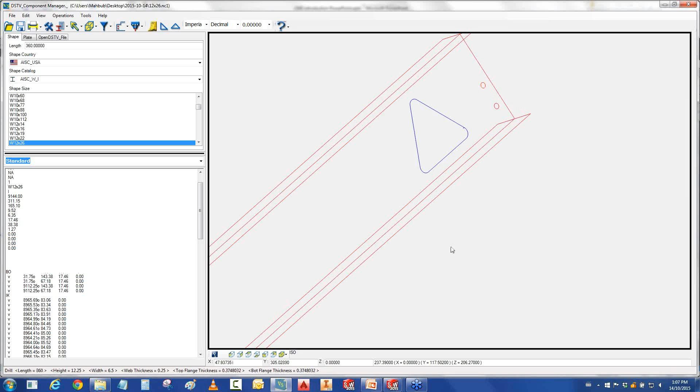So if I just select the first line and zoom out, and select the first line again, it selected the corresponding operation over here. So they're connected in real time - anything you do in your graphical console is going to impact directly your DSTV console.

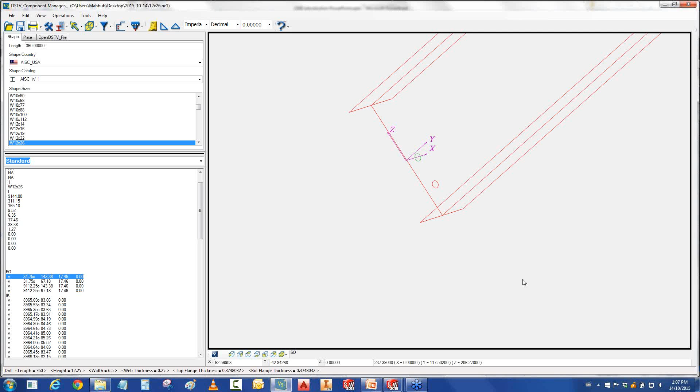So now I'm going to go to the SolidWorks platform. I have a sample I-beam open here. As I see, we got a couple of drill operations in the web and also in the bottom flange, and at the same time I got some cuts on that side as well.

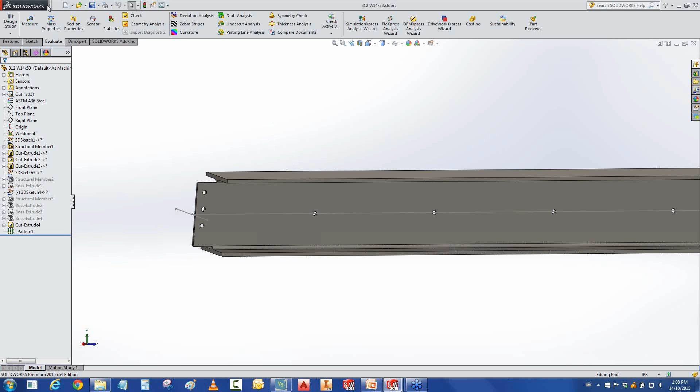So I'm going to show you the process involved in producing NC1 from a given SolidWorks file. What do you do? You open your SolidWorks file that you want to convert to NC1, and then you go to tools, where we have the plugin installed. You get 2 options, one for plate, one for the shape.

We support both plate and shape. What kind of shape do we support? We support all kinds of I-beams, channel, and angle. Unfortunately we do not support round profiles in SolidWorks, and also we do not support the T profiles at this point. So as long as you have the I profile, channel, and angles, and at the same time all the plates - it could be a round plate or any kind of regular plate - we support here.

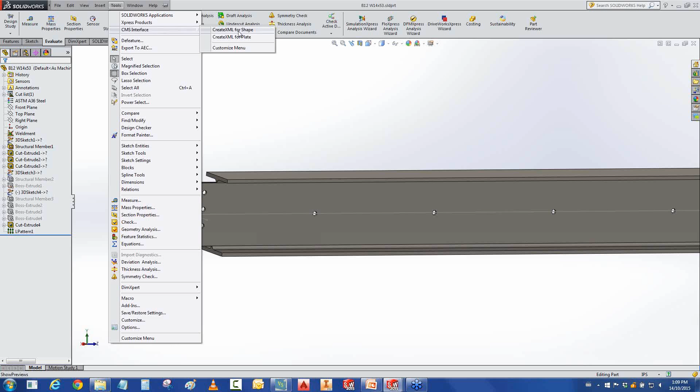So what do you do? You just come to these options and select the right tool you're looking for. I'm going to select the Create XML for shape. Why Create XML? What this plugin does is actually create an XML file from the SolidWorks file. The plugin produces an XML file, and the XML is sent to the CMS.

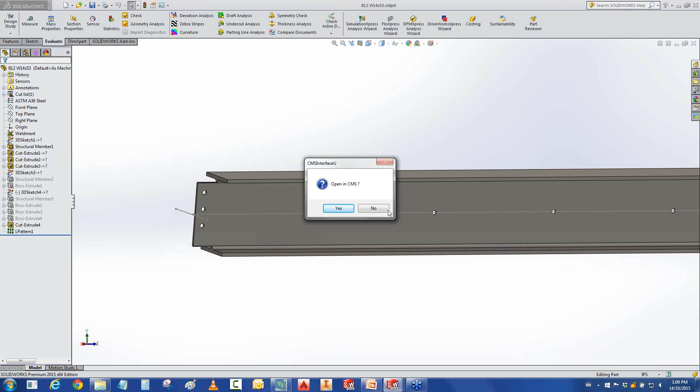Then the main CMS platform picks that XML and produces the NC1 file. Now it's asking for permission to open it in CMS, so I'm going to open it in CMS. So what's happened in the background - the XML has been produced, and then it's looking for the correct size. So I know what's the correct size, I'm going to go and find that correct size.

This automation has not been done yet, so we are still working on that. But at this point, you just have to choose the correct profile that you are looking for. Once you know what's the correct profile, you select this one and say yes.

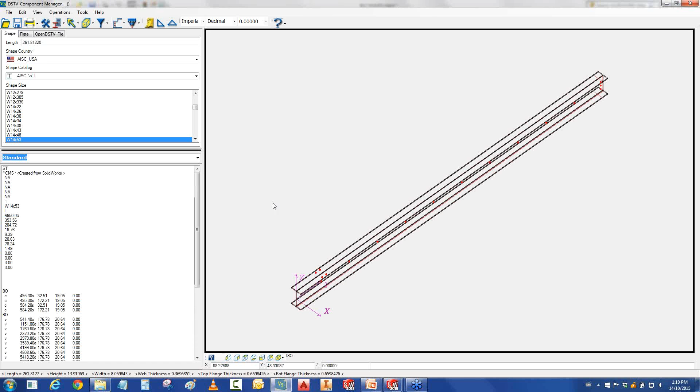So here you go - you got your DSTV produced in real time. The DSTV is produced. If I just remove the shape lines, I can see the part produced here. So this is the process involved in producing NC1.

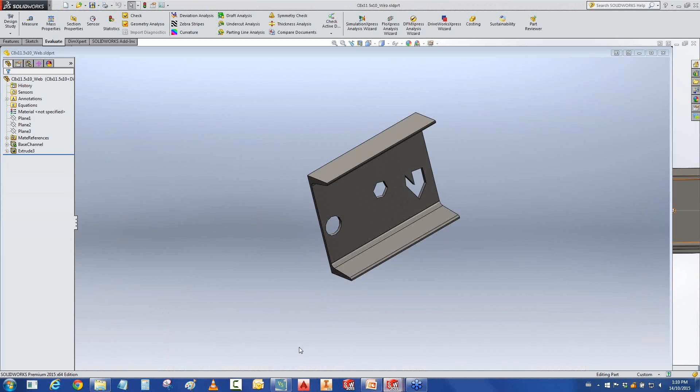So I just want to repeat that process with another example. Okay, so I have a channel here, with just a funny cut on that, but I just want to show the process involved here. Again, what do you do? You just go to tools, select the right plugin, and then it asks for the permission to open it in CMS.

You say yes, and then the XML has been produced. You just go and look for the correct size in CMS - at this time it's a channel. So I'm going to select the correct size for my channel. I select yes, and the DSTV has been produced here.

So I just chose that part on purpose. As you can see, this drill is on the left hand side corner. But if I just look at the DSTV over here, I can see the drilling on the other side of the part. So I selected this one on purpose.

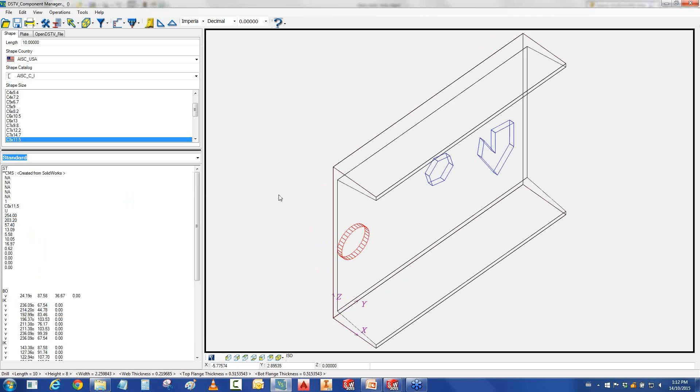This is the same part - it doesn't matter how you see it in CMS, but if you still want to see it exactly as your part, you can do that quickly in CMS. So what happened is the part was mirrored. So what I do is go and mirror that part to produce the NC1 file that corresponds directly to my part file.

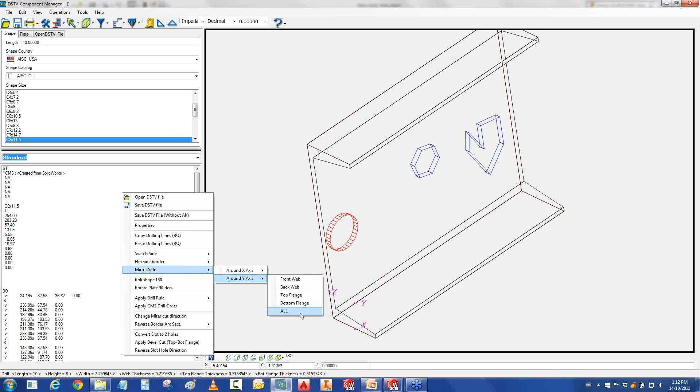So the purpose of showing that is, let's say you have a left hand side and right hand side part, and you just don't have to draw both sides in SolidWorks. So you can actually save your time in terms of your modeling purposes. You can just produce your left hand side and come to produce your NC1 for the left hand side, and then go and use that mirror operation and produce your right hand side part. So that kind of automation.

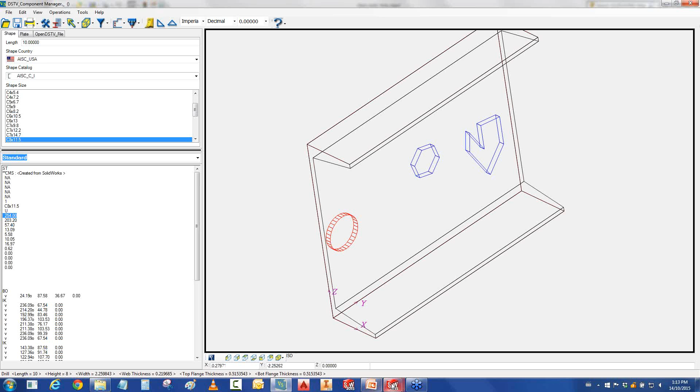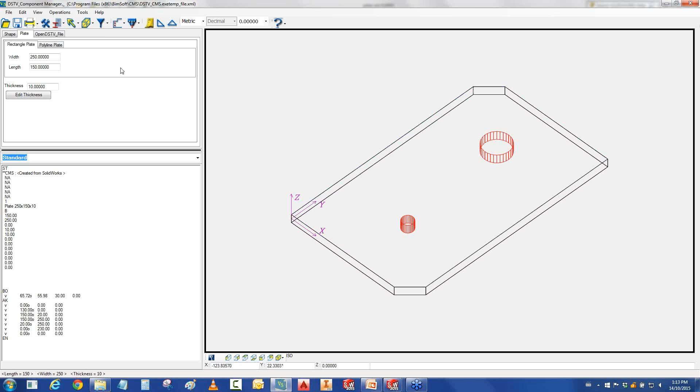This is just a quick example of how you can produce both left hand and right hand side part from NC1 from SolidWorks. Now I want to show you the process involved in producing NC1 from a given plate. So I have a simple plate. You just do the same thing: select create XML for plate, then send it to CMS. Plate is pretty straightforward because you don't have to select the size, because CMS has the internal capacity to understand the diameter or parameter of the plate, so it brings this by itself. Then you just save your file. That's the process involved in producing NC1 from a given SolidWorks file.

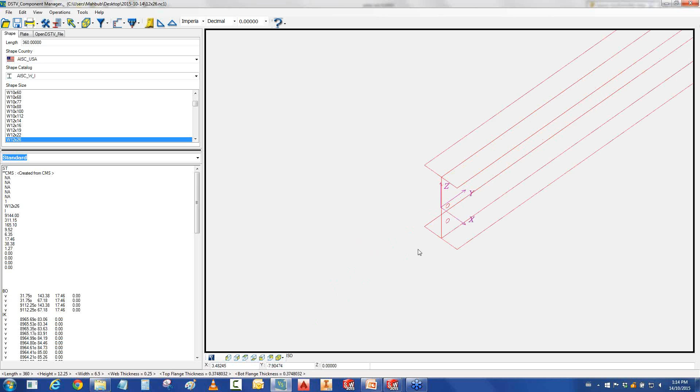I'm going to show you an example of different manipulations you can do in CMS. I'll open a sample NC1 file. You can even open a third-party NC1 file and start manipulating that part here. So I'm going to show you an example of those. This is an I-beam, and I'm going to zoom in here and select this one. Let's say for some reason I just want to change the position of that one.

So let's say I have the XY position over here, and at the same time the diameter here. I'm going to change this diameter and the position parameter here. I'm going to put it more inside the part, and also at the same time change the diameter as well, just to show you how we can do it quickly in CMS.

At the same time, you can change your slot, change your drill to slot operations as well. So I'm going to give it a distance of 4, and at the same time, just for fun, give an angle of 45 degrees. You can actually change your operation in CMS in real time and see all those changes in the DSTV file. As you see, all those parameters have been updated here - both angle and distances and diameter have been changed.

Sometimes I have clients whose machine cannot support slot operations. So what they look for is two drill operations, at the start point and at the end point, and they manually join these two drill operations. We actually have a quick tool in CMS that you can use for that instead of finding those two drills manually, which would cost a lot of your time.

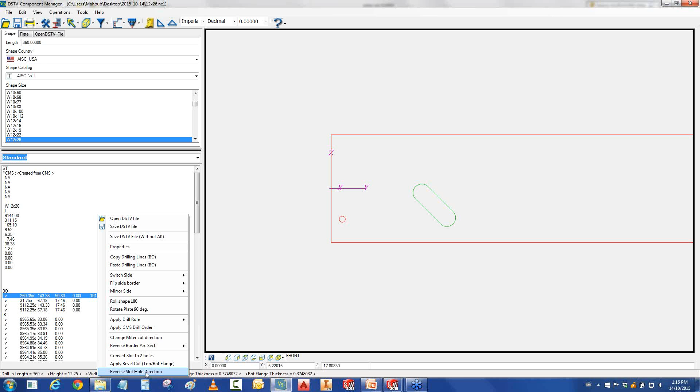So you just select this one, and we have a tool over here called convert slot to two holes. Once you apply that, if you zoom in here, you see this slot hole has been converted to two holes. You can actually see these two additional holes in the DSTV as well - here are the two additional drills. So you can just convert any slot to two drills.

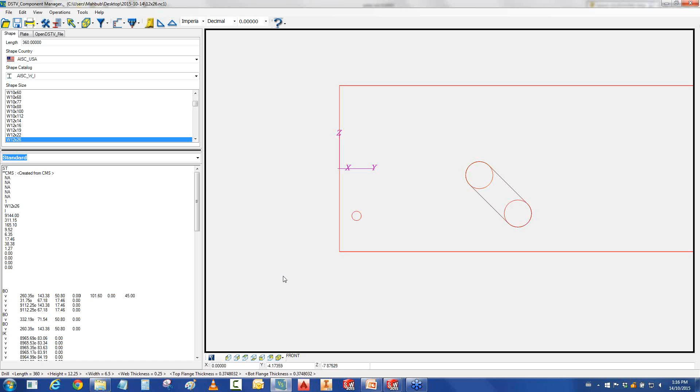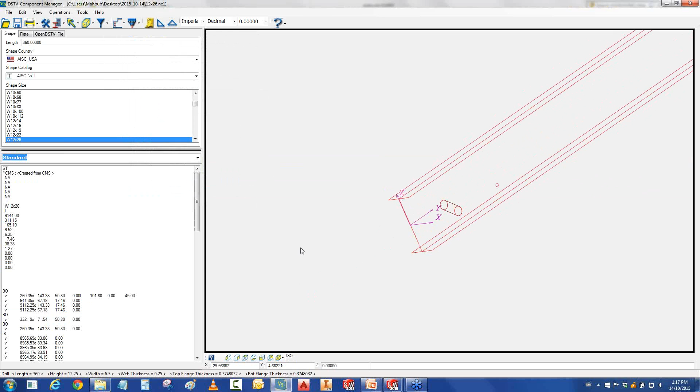At the same time, I'm just going to change that position quickly. I want to do some other operations as well, so I'll do it pretty quickly - change the position of this one and put it back. If I go to the ISO view again, this is my part right now. Some of our clients use a couple of our quick tools here, which are pretty handy to use - one of them is Cope Chamfer.

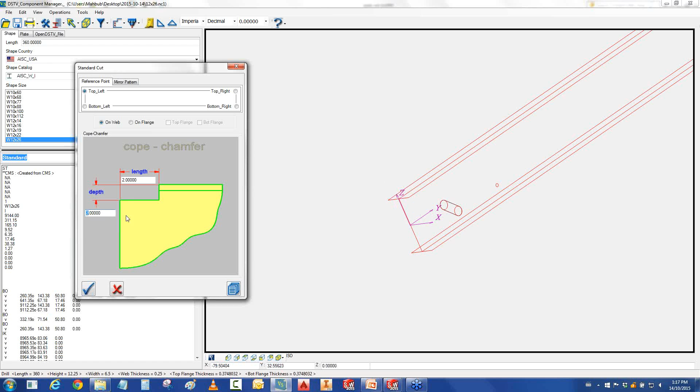So I'm going to use that one on one of those. You just have to select where you want to apply it - I'm going to apply it in the web, and then in the top left corner over here. You just give it the parameters - I'm going to apply 4, 4, and 4 or 2 at this point, and say apply. Once you apply this, you see your graphical window and the DSTV has been updated correspondingly. So it's pretty quick.

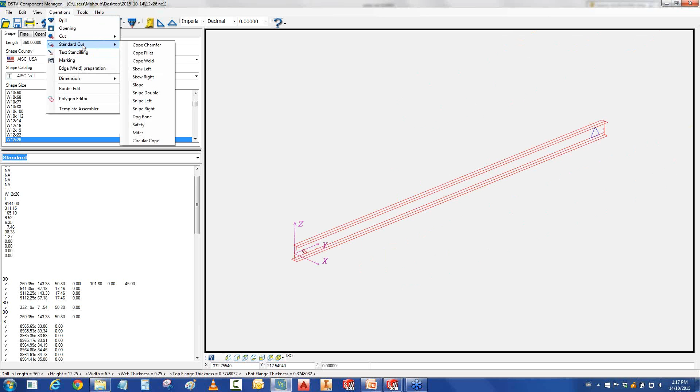At the same time, if you just want to apply other operations, one of the popular ones is miter cut. I'm just going to apply it on my flange, on the top right corner. You can give it an angle or a length, whatever you want. Let's say you want to apply a 15-degree miter cut on the right hand side, and the length gets calculated in real time.

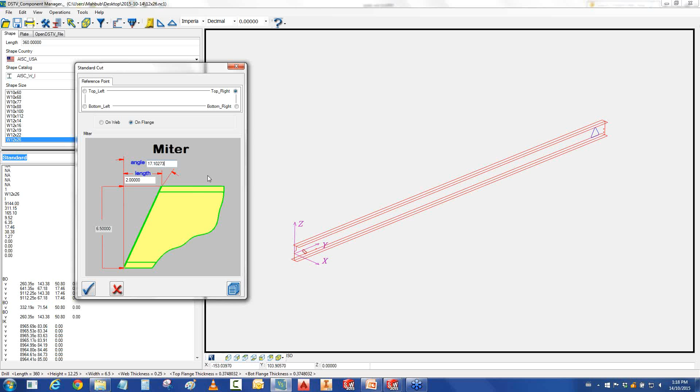Or you can do it the other way, giving it a length for how much you want to cut on that side. Let's say I put 2. So the angle gets calculated in real time, and then you can apply it here. As you see, this cut has been updated and applied - this bevel, this miter cut - and at the same time on my DSTV, the miter cut has been updated.

One more thing I want to emphasize: these 5 info lines are not necessarily important for the CNC machine to do operations like drilling, internal cut, or slot operations. These are actually for our own users' purposes, so the NC1 handler knows what part he's handling, who's the client, what's the job number, that kind of stuff.

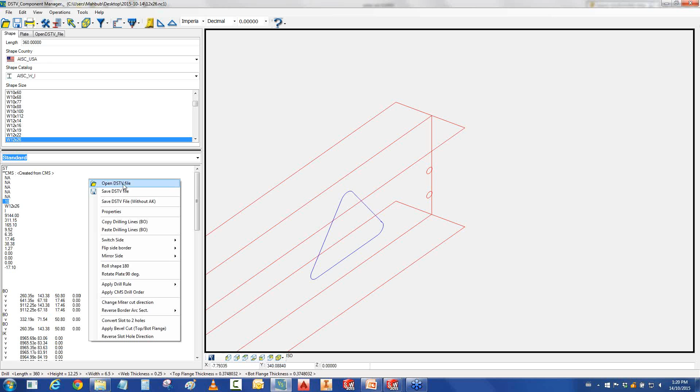At the same time, if you have multiple parts with the same operations, you can change the quantity in real time. So you can use that same NC1 file for your 10 parts which are exactly identical. You don't have to feed your machine every time with those NC1 files - you just feed it once, and if you have 10 identical parts, your CNC machine will take care of that. I want to show you how clients actually take care of those lines sometimes, so I have a sample here.

See, they put the part number, what kind of client it was, and what's the purpose that you're dealing with in that NC1. So that kind of stuff you can actually do in CMS.

I also wanted to show you a couple of other examples you can do quickly in our CMS platform. One of those is text stenciling and marking. Let me show you a quick example of applying text stenciling. Let's say I want to do some text stenciling on my front web. I come to the correct view - I'm in the front web. I select my text stenciling tool, then give it a position, where you want to apply this text stenciling. I'm currently in imperial mode, so I'm going to adjust the x and y offsets.

I'm going to put something in the middle. Since my part is 360 inches, I'll say something near 150 inches, and my part is 12.25 inches in height, so I'll put it at 6 inches. At the same time, I can give it an angle, but I'm not going to apply this at this point, so I'll say yes. If I zoom in, I can see the text stenciling has been applied. At the same time, if I look into my DSTV window, the DSTV SI, which is for text stenciling, has been applied in V, which is front web - all these parameters have been updated in real time.

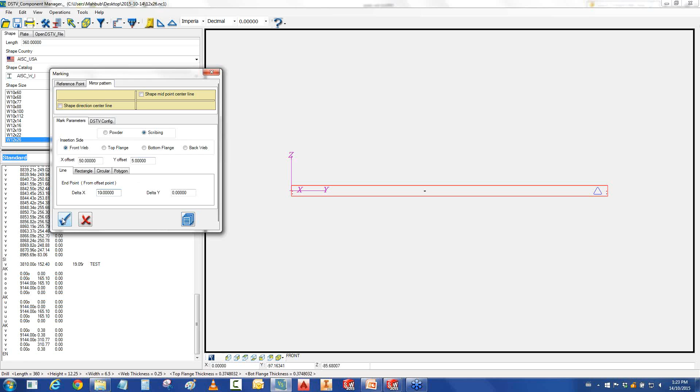Again, you give it the reference point, where you want to apply it. I'm going to say 50 inches in the X direction and 5 inches in the Y direction, and I'm going to apply a line at this point. You can apply a line, a rectangle, or do circular marking as well. I'm going to go for just line marking, so you give it a del X and del Y. I'm going to keep it a straight line, so my del Y will be 0, and I'll give it a 10-inch length. I'll say apply - here you go, you can see this line applied in real time.

At the same time, if you just select this operation, you can see this marking tool has been applied in NC1 as well. So these are the quick tools that you can apply in our CMS.

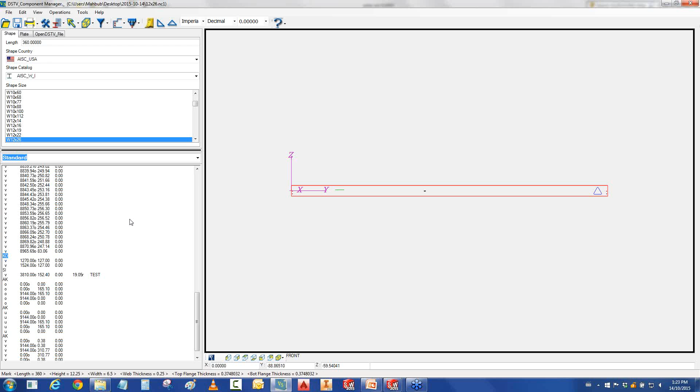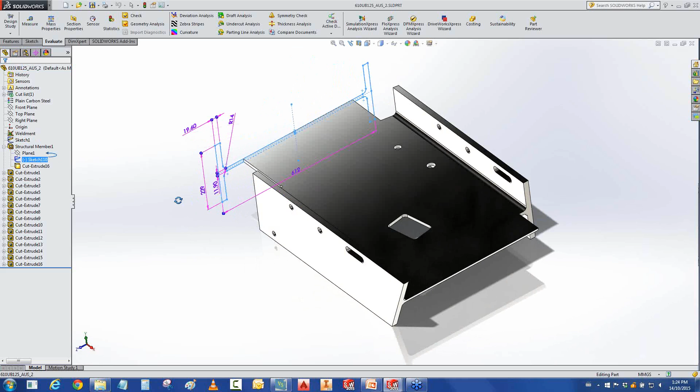I want to show you one more example. I have two test files here to show you the compatibility of the SolidWorks file. As you can see, my main profile is presented here, which is really important and crucial for the CMS plugin, because the plugin has to read that profile. At the same time, all those features have been used, like extrude, and all the sketches are present here. These are the ideal files that are pretty easy for CMS to pick up and produce the NC1 file correctly and seamlessly.

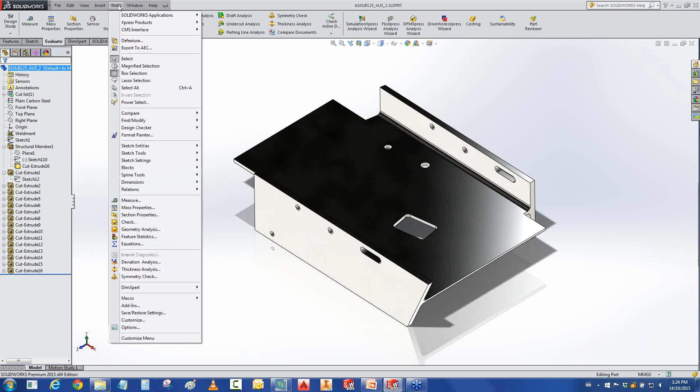Shouldn't have any issue at all. So what you do is just send it to the correct plugin, and then you select the correct size. I'm going to select the Australian profile, so I'll select the correct size, and say yes. So here you go — you get all those operations coming in no time.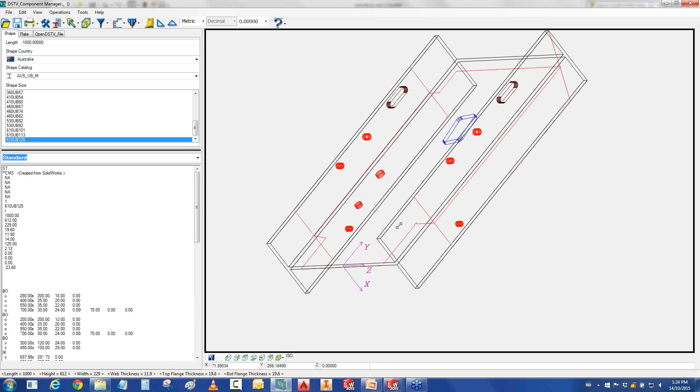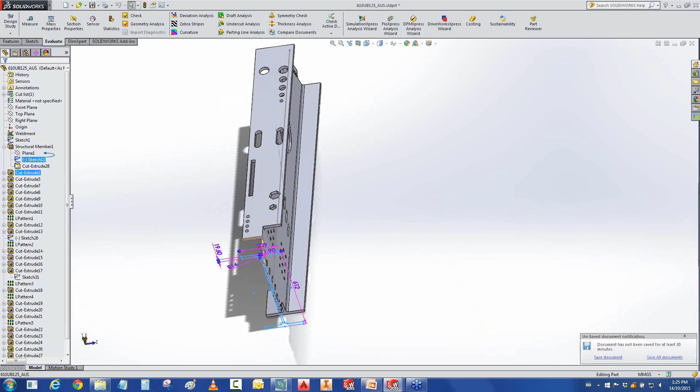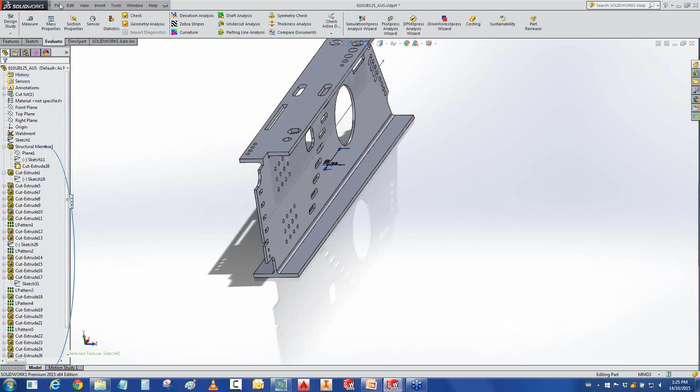It's pretty straightforward, so I'm going to show you one more example. Again, this is a fancy I-beam, so you get tons of operations here. As you can see, the main profile is sketched here, and at the same time all kinds of features have been used — cut, extrude, linear pattern — and all those features used are actually present in this part file. That's what we look for in CMS in a given SolidWorks file. As long as you have all that data, CMS will have no issue at all and will produce the NC1 file in no time. So I'm going to send it to CMS again.

I'm going to say yes. So it reads the XML file from SolidWorks, and it's producing an XML file. What you do is just go and select the proper size. The proper size has been selected, and say yes. And here you go — you get your NC1 file ready in seconds. So what you do is save your file. These are the things I wanted to show you so far.

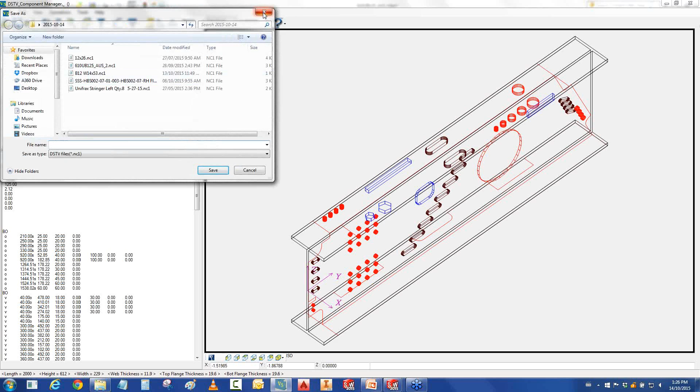Just one last thing, it's pretty interesting. I'm going to open one of the files here to show you some of the powerful built-in operations within CMS. Let's say I have a channel here. To comply with this cut on my web, I need a web edge preparation, or bevel operation on that. So what do you do? You can do that manually in CMS.

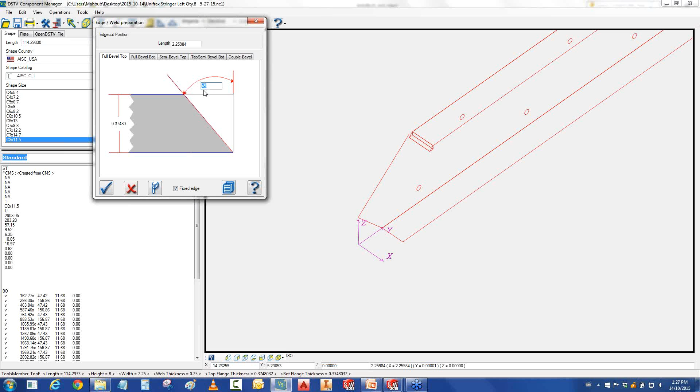So I have an edge preparation tool here. What you do is go and select the right face, select the start point and end point, and then apply this angle — you just have to know what angle it is. Let's say I'm going to apply 45 for now, just to be roughly right. So it was actually not that — you'd have to go and calculate that angle manually.

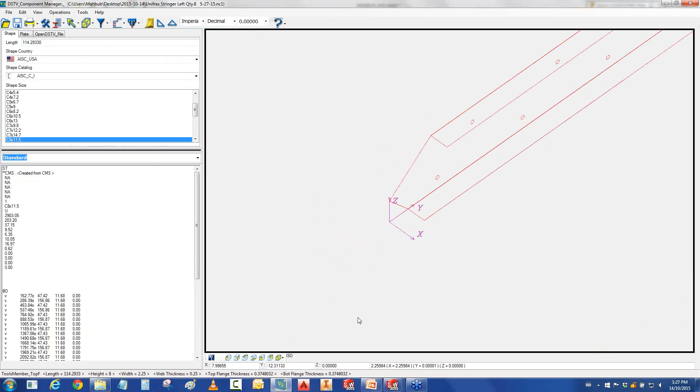That could be time consuming, but you can actually do it pretty quickly in CMS also, because we have another tool that saves a lot of time. If you just right click over here, you see 'apply bevel cut, top and bottom flange.' I'm going to apply this one. CMS calculates those angles and applies those bevel cuts in real time. It's so quick — I didn't have to calculate those angles, and CMS just applied all those bevel cuts with a click of a button. As you see here, those angles were calculated and those bevels were applied on four sides. These are the things I wanted to show you today.